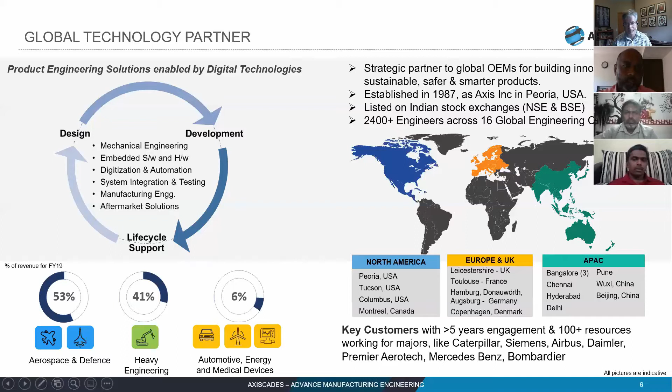So what we basically do today is provide product engineering solutions in the sector of mechanical engineering, or digitization, which we will speak more about regarding manufacturing engineering today. So in this slide, you can see we are serving in the areas of aerospace, defense, heavy engineering, automotive, energy, and medical devices. So we have the right product knowledge.

We provide engineering solutions whether it can be on-site or offshore, depending on various business models. The whole idea is providing any kind of engineering in the entire product life cycle. Anything related to the engineering world, we provide the solutions.

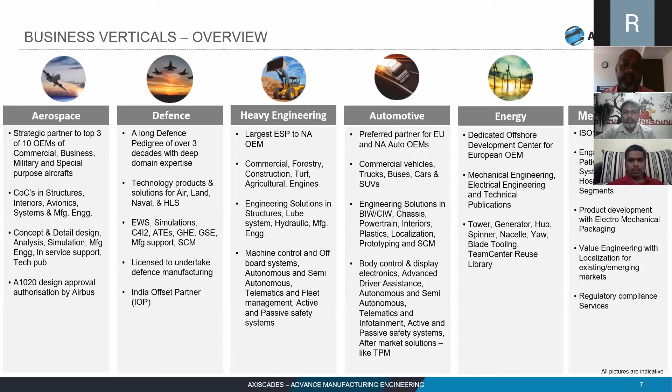I am Murari. I am currently an advisor for AXISCADES, helping develop business strategies for them. I have been in this role for the last few years, but prior to that, I was heading the global manufacturing solutions organization for Caterpillar.

We used to support more than 55 factories and product groups of Caterpillar worldwide, helping improve their time to market. So today, I'll be taking you through how virtual product and process development can help not only mass manufacturing companies, but also companies that produce custom-built machines.

VPPD, or Virtual Product and Process Development, is also called digital manufacturing in today's world. All of us know that CAD, computer design, has evolved over a time period, and today almost every design that we do exists in a 3D environment. With that advantage, VPPD has also evolved because of the excellent visualization capabilities that these tools provide to us as developers.

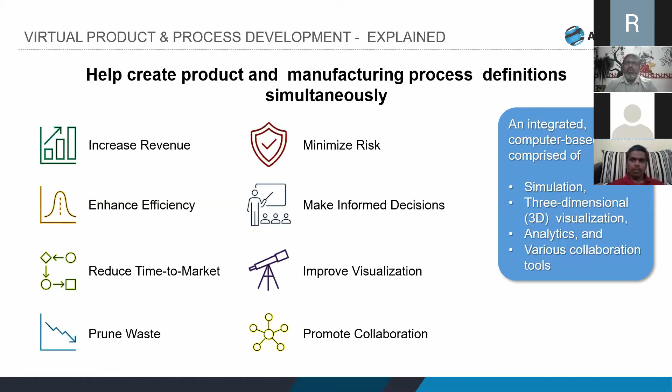Back in 2003, CIMdata did a survey and identified that a company investing in digital tools from a manufacturing standpoint can realize almost 5 times the benefits of ROI. This was communicated way back then, but in the last 17 years, the technology has improved significantly, and with better connectivity and collaboration tools in place, we see much more benefits when we deploy these VPPD concepts and tools in new product development as well as continuous product improvement programs.

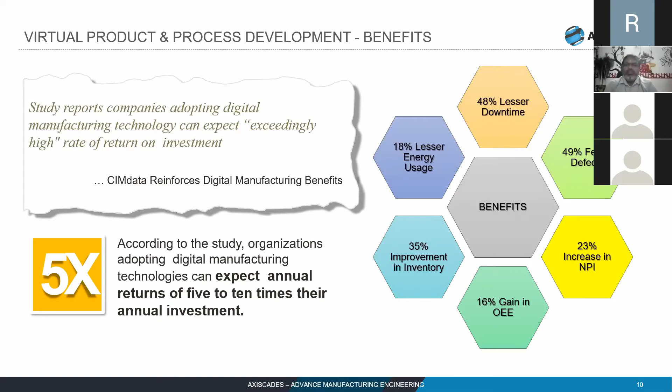All of us are familiar with the new product development cycle. It all starts with a strategy or a concept, and goes on until production. In between, we have different stages through which the new product development program progresses, with different gates in which the designs, concepts, detailed designs, and manufacturing drawings will be evaluated.

So all these happens, then we get into prototyping, physical prototyping. Once the physical prototyping is done and we are convinced, then we get into pilot manufacturing to ensure that the actual manufacturing situation is conducive for us to produce machines on expected lines. Then we come to the launch date. So in a typical new product development cycle, we go through all these phases, and the machine goes to production.

It also happens in a continuous product improvement program, CPI programs. On the right, you can see the Deming cycle, the PDCA, where when we come across any issue or think of improving a product, we do certain things in a systematic manner and again relaunch the machine or product into the market. So whether it's a new product development program or a continuous improvement program, you can still use these VPPD methodologies and tools for your benefit.

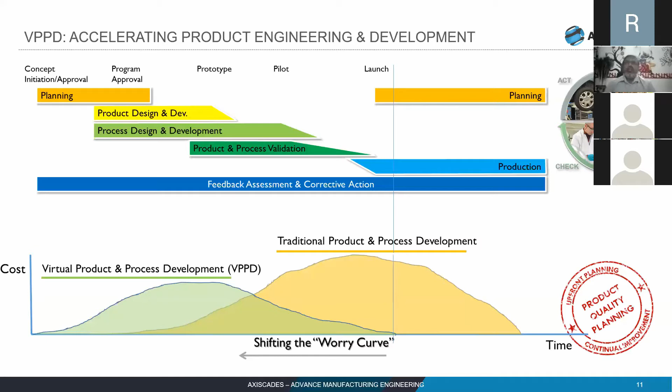So if you see here, the VPPD is well ingrained into the NPI program, new product development program, particularly on product design and development, process design and development, product and process validation, and to a certain extent even on the production phases. All of this, in large corporations, is effectively managed through a backbone which we call product lifecycle management, PLM. There are a lot of PLM tools which all of us are aware of, like Team Center Engineering or Team Center Manufacturing, 3D PLM, Windchill, and all those.

These PLM tools have embedded software applications which help you perform necessary validation and visualization using a suite of applications. But the good part is these software applications are available separately - they need not be embedded into PLM. If it is done inside the PLM environment, that would be the best thing to happen, but companies are not limited to having a PLM. They can have these applications as standalone applications and still get the maximum benefit out of them.

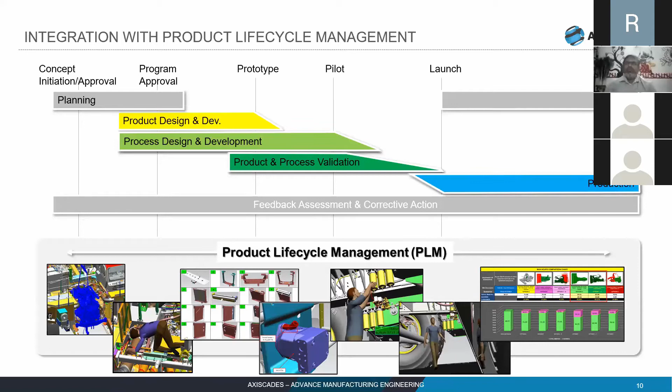These are some of the software applications and tools that are very prevalent today in the market. Siemens and Dassault Systems lead that effort - they are considered to be the pioneers. They bring the best of the technologies for companies to use to bring their products on time, every time, at a lower total cost. But there are also other corporations like Autodesk, which offers a complete suite of products called Product Design and Manufacturing Collection, which helps any corporation to evaluate their designs from both design and manufacturing standpoint upfront.

There are tools like RAMSIS, which helps us do ergonomic analysis, and tools like FlexSim, which helps us perform discrete event simulation and identify issues upfront, even before the physical build happens. Tools like aPriori, MTI systems, and others help develop cost models to understand the target cost of a new product, or help prepare should-cost modeling, where buyers or purchasing teams can effectively negotiate with suppliers and realize a better cost advantage on the parts they produce with their supplier ecosystem. Tools like VSA, Variation System Analysis, shown on the bottom left of the screen, help us perform tolerance stack up.

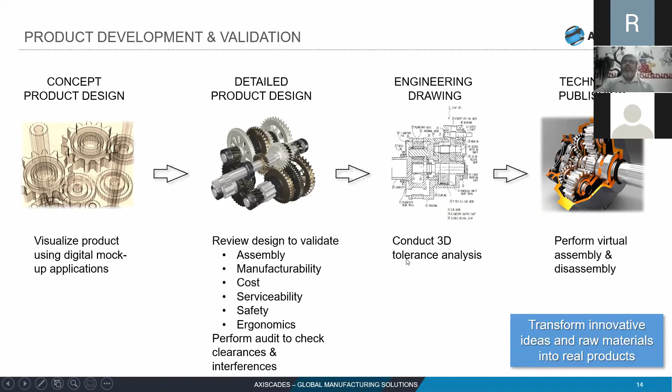So this is how VPPD helps on the product development and validation phase. When it comes to process design, development and validation, the benefits that we get out of this are immense.

As the 3D models mature in the product design phase, since all these are happening concurrently, the manufacturing engineering and product engineering teams work together, and the process designers can start creating their process plans even before the drawings are released for production. This means all the process definitions can be made upfront, and the teams can be ready for production at any point in time.

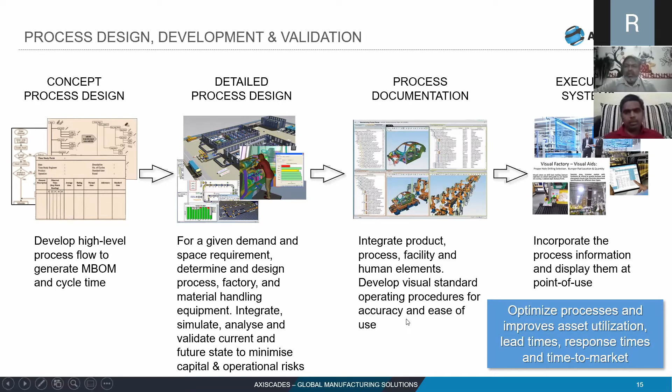Thank you, Murari. This is Subbu, and based on what we had seen in the previous steps, whatever we could do virtually on each stage of an NPI cycle, we had tried to consolidate a few examples which had taken care of most of those steps to virtually prove the product as well as process as well as plant, all of them, and has helped them in taking decisions and getting the product to assembly line and to market on their launch dates or even earlier as well.

So the first case study that we are seeing is basically from a product design point of view. This case study is for a heavy construction and mining industry company, and they utilize these virtual tools almost on every NPI cycle. And this case study was taken for just one of the heavy construction.

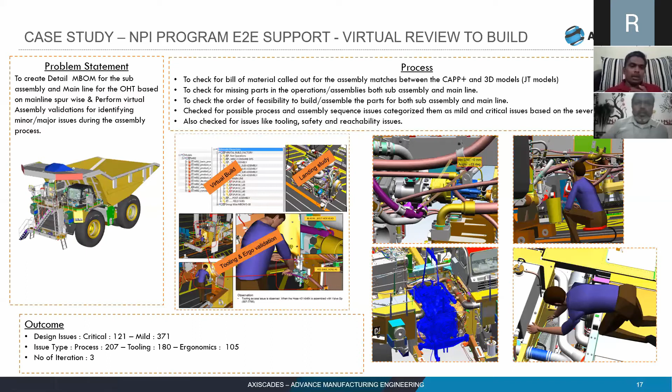Based on model maturity and fixing of all these issues, the product is released only after all these criticals are addressed. Once it's released, it's probably near perfect for actual production as well. So that's what this particular example states.

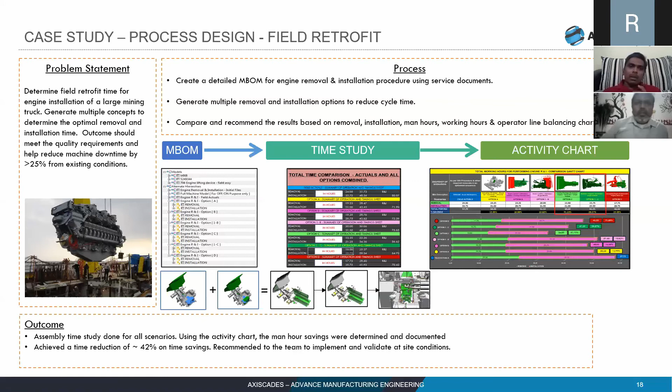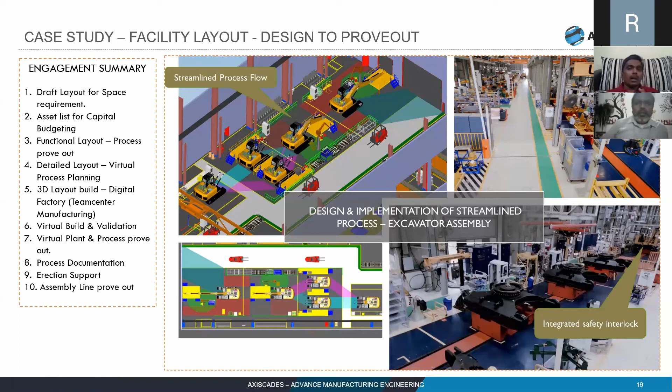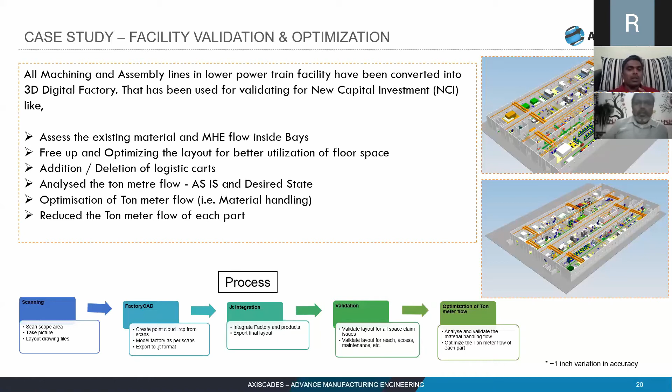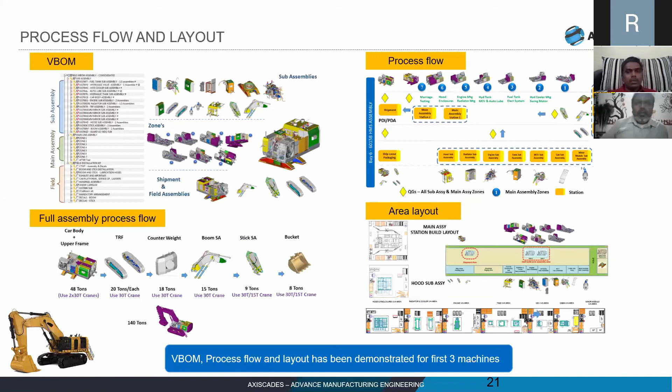So that pretty much sums up the case studies. But if you would like to know more, we could have some more case studies discussed. Since we'll be having the contact details of Sanjay at the end, you could get in touch with us for more insight on specific areas of application.

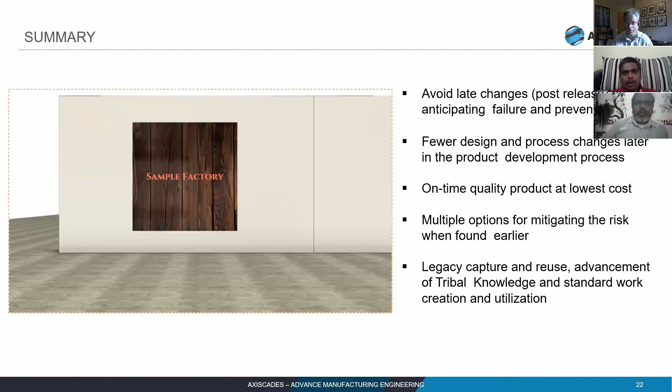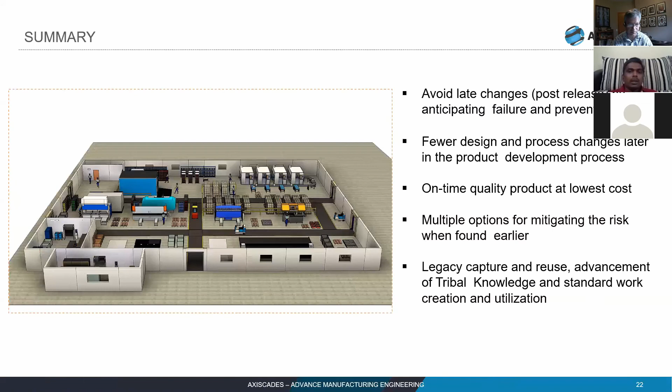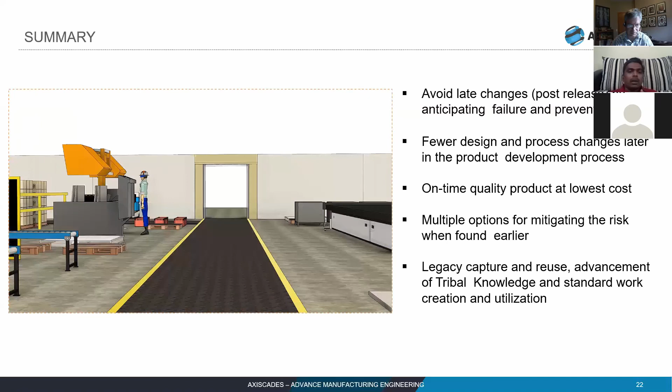So basically, to summarize everything, the virtual product and process engineering would avoid late changes post release. Basically, we are trying to reduce the number of releases of the drawings by anticipating the failures before the model actually gets released. That would help save lots of cost and achieve the desired results on the actual plant.

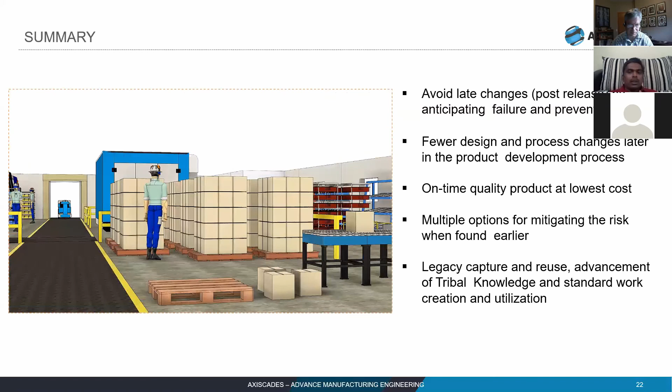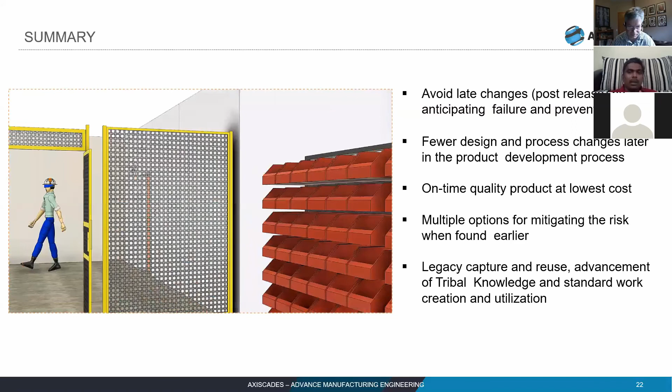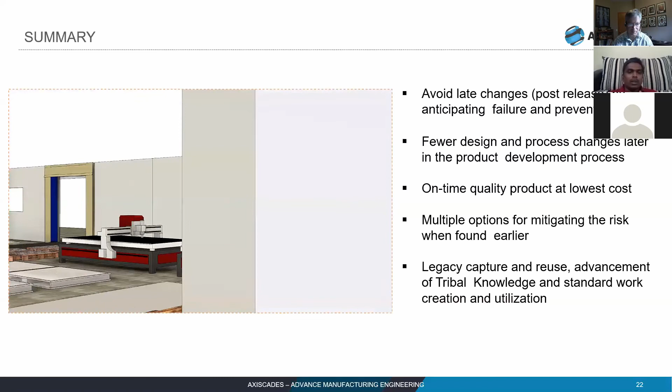Fewer design and process changes later in the product development process. Basically, we would be reducing the process changes that would happen in the assembly line or in the field, by virtually proving it and preparing documents or visual aids to help the operators perform by the sequence suggested by us. So, on-time quality product at lowest cost by doing virtual engineering, most of the time we would be hitting our NPI timelines, or even doing better.

So when the product comes out, the first build might be a proto or a pilot. In heavy construction and mining, most of the NPIs have started going directly to the product and directly to the assembly line itself. It doesn't require a separate space to perform those pilot builds or proto builds - it goes directly to the assembly line. So by doing that, the cost of investment on a particular space, assets, operators, all are getting released, and it's almost assembly line ready the first time itself.

By performing virtual process planning, we find the risks earlier itself, and we could work on how to solve those issues by doing brainstorming and getting expert opinion from various people, and we solve it before it goes to actual production.

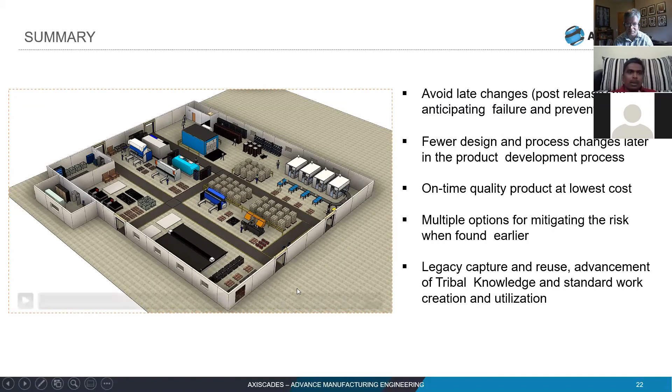So that's about it. We are open to your questions, your suggestions, for any future references, case studies, or anything. You could get in touch with Sanjay, and we have his contact details right there.

That's great. Thank you very much, Sabu, and the team from AXISCADES. Prior to meeting Sanjay, I had no idea a lot of these tools actually existed that allowed things that we used to do after the engineering drawings were released or after we started to cut steel. I had no idea that the tools existed to actually drive a lot of those activities before that, and the capabilities to be able to go through training sessions with employees prior to assembly stations being developed - very, very powerful tools. Like I say, I had no idea this even existed.